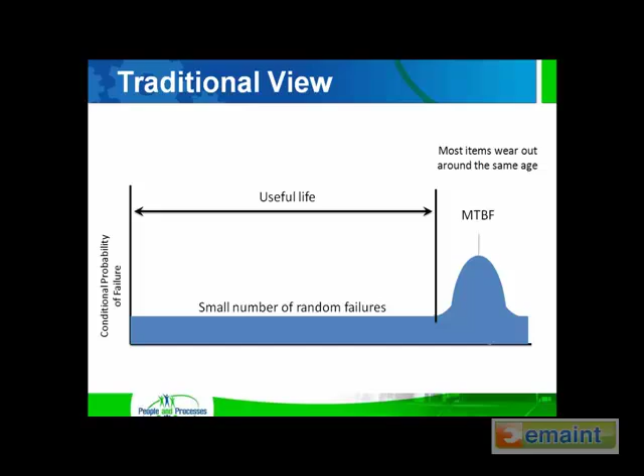So what we do is scheduled overhauls, scheduled restorations, and scheduled discards, as opposed to doing condition-based activities. And if you think about it, really about 85% of all maintenance done today is done in this traditional fashion. About 85%.

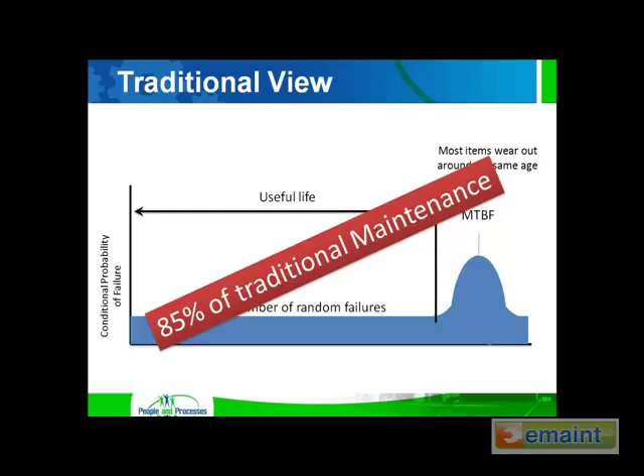So if we look with regard to maintenance cost, your most expensive maintenance that you can do is reactive maintenance, where we run things to failure.

And when we do that, we incur the downtime losses associated with losing the equipment, as well as the cost to repair. In addition, we often have collateral damage, where instead of just losing a bearing, for example, on a pump, we might lose the bearing, the shaft, the impeller, the housing, all due to the damage that comes from running to failure.

Now, if you ask, is run to failure—or should I say no scheduled maintenance—a viable alternative? Yes, it is. It is part of your strategy, but it's also not the dominant strategy we should be using either.

And if we look at time-based PM or overhauls, that's your second most expensive maintenance, and there are many organizations today that still use that as a primary means. As we said, 85% of all maintenance is still time-based, and your least costly maintenance is condition-based maintenance.

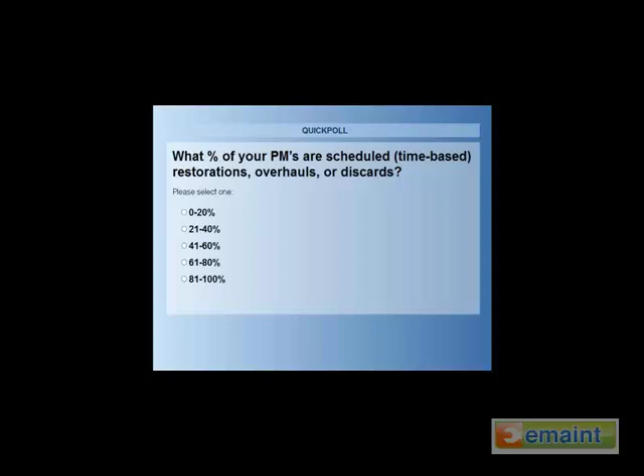All right, we're 80% in. A couple more seconds here. Okay, let me close it and share what we have.

All right, 14% of our audience says it's less than 20%. 5% say 21 to 40. 16% say 41 to 60. 21% say 61 to 80. And then 44%, or nearly half, are saying over 80% of their PMs are time-based.

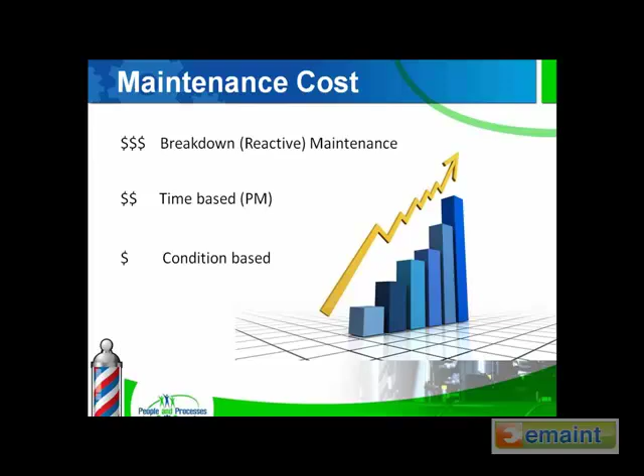Let's look at how equipment actually fails. This comes from the Nowlan and Heap RCM study that was done in the 1960s and validated again in the 1970s and again in the 1980s. It was also part of the RCM2 work that John Moubray did, and they converted it from the military and aviation over to industrial components. What they found was very similar numbers.

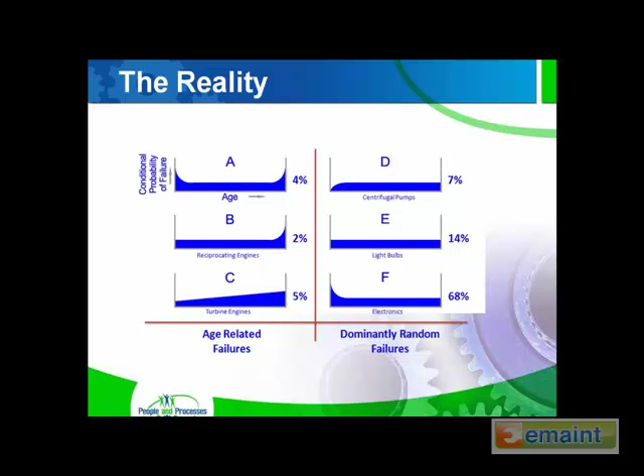Sorry, Jeff, are you there? I think we've lost the audio. Okay, I'm back. Okay, I'm sorry.

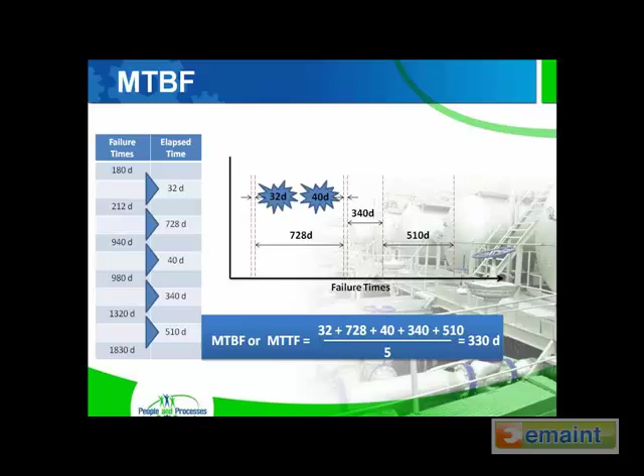Furthermore, if you look at the 32 days and the 40 days as compared to the rest, that suggests infant mortality. Infant mortality can come from several different things: improper installation methods, improper training, inferior parts. Think about what's on the storeroom shelves - they may have been there for years and exceeded the shelf life. Even a bearing has a shelf life with regards to the lubricant drying out and false brinelling occurring while it's sitting on the shelf.

So you need to take all these things into consideration, but time-based maintenance only works when we have a repetitive mean time before failure. We can come back to that, know the useful life is some percentage of that, and do the scheduled overhaul or scheduled discard at that particular point to restore it to usable condition. Again, I wanted to point out that only 11% of all components had a wear-out zone. That again points to not using time-based maintenance.

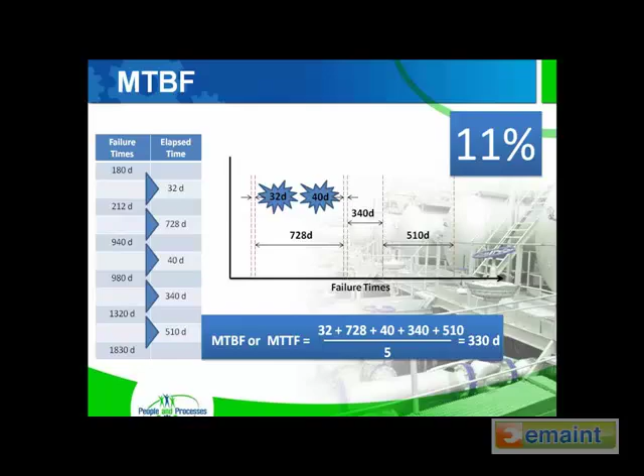If we talk about failure management strategies, we have basically two time-based strategies: schedule restoration and schedule discard. Schedule restoration is overhauls - I'm really trying to get you to use these terms as well. It could simply be restoring lubricant back to a bearing inside a pump, so we're doing the schedule restoration of the lubricant so it'll continue to eliminate friction or wear. Schedule discard is where we change the fluid out, maybe we change the oil in the car as an example.

And then on-condition tasks. An on-condition task takes the form of two different things: either the use of predictive technologies like vibration, infrared, ultrasound, oil analysis, and all those other technologies, or simply just looking for it in the act of failing.

It's important to mention here too, with preventive maintenance, the fixed interval approach means we're replacing parts whether they need to be replaced or not, on an interval based on time. So when we do an overhaul, we're replacing everything whether it needs it or not, and at the same time we're introducing the opportunity for infant mortality simply from poor maintenance practices. There's a statistic out there that says up to 70% of maintenance failures are self-induced - from training, parts, installation, poor purchasing decisions, on and on. So every time we do intrusive maintenance, we offer the opportunity for failure.

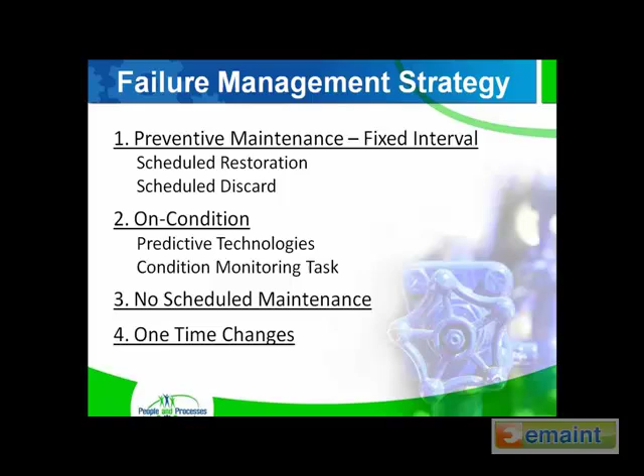People always ask, Jeff, where do we start? I've always heard that we want to do it based on criticality, and if you're doing a new site, criticality is a great way to do it. But if you've already got equipment in place, most people already understand what your most critical pieces of equipment are, and you're already doing tons of maintenance activities around that. You may even have service contracts on it, for example.

But where I encourage people to focus on with regard to optimizing their PM program is, where are you bleeding? Where are you hemorrhaging the most money, the most downtime, the most maintenance hours, the most spare parts cost? Those are the places you need to focus on first and need to optimize, because that's where you're losing your money and you're losing your production capabilities.

So focus there. And borrowing from the RCM piece, what we're really after is to determine what are the actual failure modes of the equipment. And to do that, we want to understand first, what is the function of the equipment? The very first primary function of a piece of equipment, for example, is what we bought it for.

In this particular case, we may have a pump, and the sole purpose we really bought that pump for was to be able to transfer water from tank A to tank B at a minimum rate of 75 gallons per minute. And then we have functional failures.

We may have multiple functional failures for any given function, and typically you have a partial failure and a total failure. So if we look at this particular case, we started with the total failure, and it's unable to transfer water at all. There are failure modes associated with being unable to transfer water at all, as compared to being unable to transfer water at a minimum of 75 gallons per minute, which means partial failure. So we have total failures and we have partial failures.

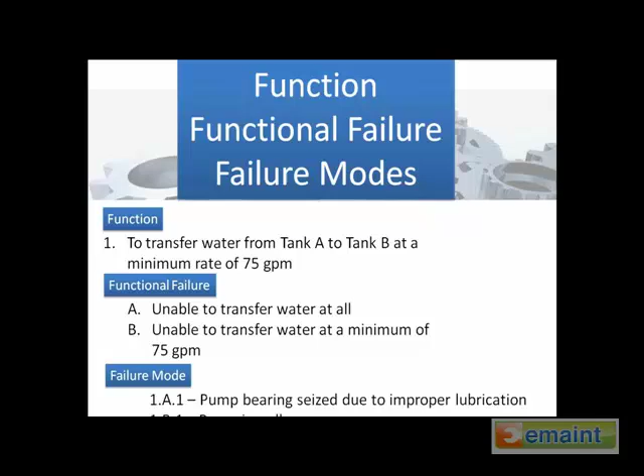If we look at the failure modes for those, for unable to transfer water at all, the pump bearing seized due to improper lubrication. And then we can figure out how we can address that from the PM task, condition monitoring task. We might use vibration as an example to find out if we're properly lubricating the bearing, or many different options that we can use.

And then for 1B1, the impeller worn is we're able to pump, but we only have a partial failure, and we can't meet what their user requirement is. Their requirement is 75 gallons per minute. We may be pumping at 60 gallons per minute. We haven't totally failed, but we're not meeting the user requirements. So we determine our failure modes, and from our failure modes, we determine our task.

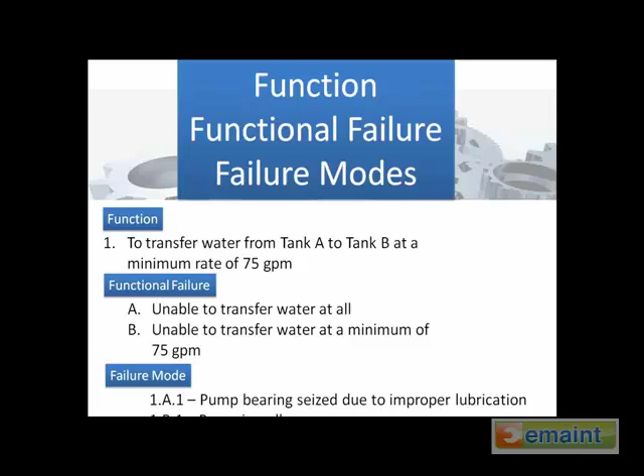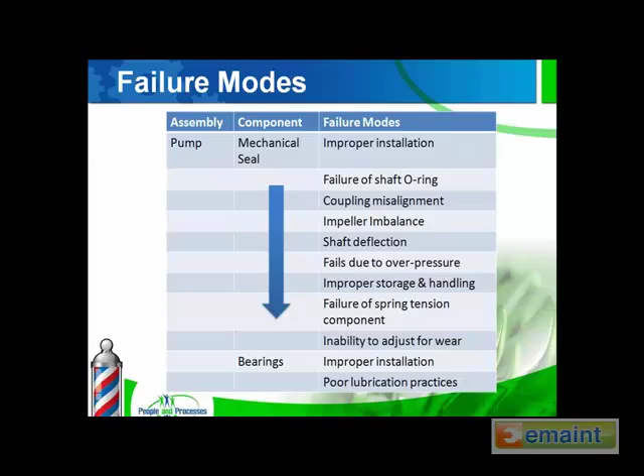So if we look at the failure modes, here's some examples of failure modes. There are lots of different ones, and it's all related really to your operating context. You can't just say, well, I'm going to take this off the internet, I found these failure modes, and I'm going to use them in my PM program. You can't do that.

What happens is your operating context matters—you might be pumping concrete where I'm pumping water with the same pump. So my failure modes might be very different than your failure modes. Again, operating context plays into that.

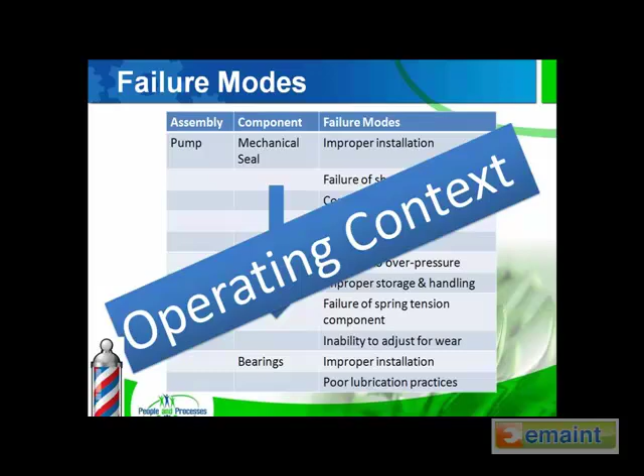And if it is, then the very first thing we want to do is develop a condition monitoring task. And if that's not technically feasible and worth doing, then what we want to do is develop a time-based task, a scheduled restoration, or a scheduled discard. And that has to be technically feasible and worth doing.

If we can't do that, then we either have to redesign the system, and in the safety and environmental issues, that's a compulsory obligation, okay? Where in operational and non-operational, that's not compulsory, and it's up to us to decide whether we want to accept the failure risk. We can't do that from a safety and environmental perspective. And then the fourth option is we can just accept the risk and run it till it fails, and that's a very viable strategy.

If we took the sprinkler system that irrigates the front yard, we're not going to do a lot of maintenance on that. We're not going to do condition monitoring or anything like that. When the sprinkler head fails, we're going to go out and fix it. We're not going to invest money to PM the sprinkler heads. So that's a good example of things that we run to failure.

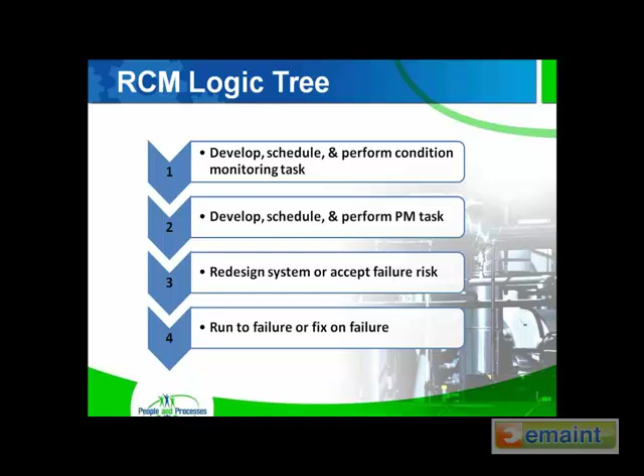So we talked about doing one-time procedural changes, which was basically the same. When we selected something like no scheduled maintenance as an option, that doesn't mean we can't make a change to a procedure. So you think about what happens with your operation side, your startup and shutdown checks, your cleaning procedures, any operator procedures with regard to how they run the machine, any kind of visual aids you can add, for example.

Like a green transparent film over a pressure gauge to indicate this is the zone it should run in, and if it's in the red area, it's not where we want to be. Same thing for maintenance procedures, not just the PM task itself, but also maybe a job plan with regard to how we plan and schedule work and do the corrective action for the repair. And as part of the one-time procedural change, we can also do engineering redesign.

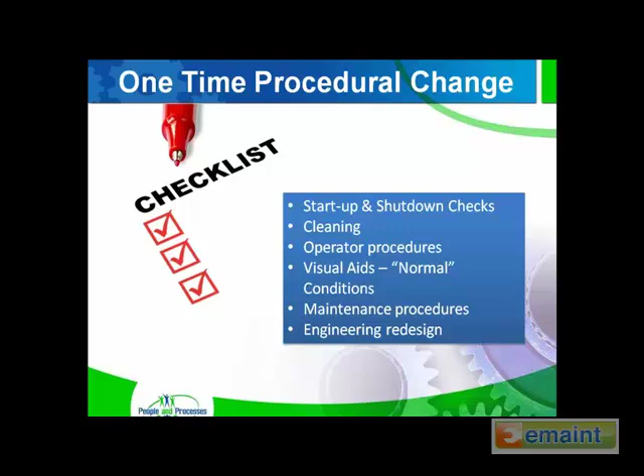When we look at the PM task itself, what we're really looking for is standard procedures or standard work, and we're looking for precision maintenance. We'll talk about precision maintenance in a minute, but standard text, any kind of lockout, health and safety concerns, disposal issues, anything like that, we want to make sure we have in the PM task. We want to make sure we've got ergonomic hazards with regard to lifting or bending, and we want the procedures detailed, with task times for those.

Task times are simply how long we should estimate it to take to do the work. Now, people get upset about task times, but the intent is we've got to be able to estimate from something how long the job's going to take. So what we do is break that down by procedure, by each task step, adding minutes, and then total those up at the end and say, okay, this is a 3-hour job.

We don't really want to get upset if those jobs take longer than estimated, because sometimes they do. We get into a job and realize, hey, we're going to have to do this, for example, that we didn't plan on. Maybe the bolts are rusted and we've got to cut them off, whereas 6 months ago we didn't have that problem. So it's okay if they vary, but if you get in and realize the equipment is going to take longer to fix because it has more damage than originally anticipated...

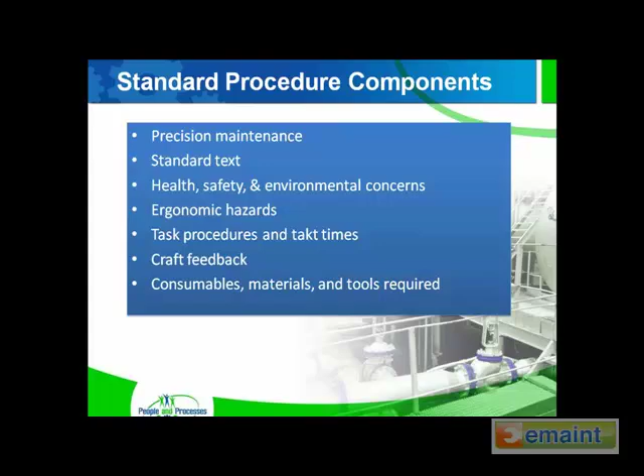If we look at that standard text, what you typically see is lockout, tagout, check belt. Well, if I ask anyone in the audience, I can get one answer for check belt. If I ask someone else in the audience, I can get another answer for check belt. And what do we really mean?

And the same thing for check auger. So what we're looking at is something more descriptive, like what you're seeing now on the screen: lockout, tagout. Install lock on auger disconnect 54 and lockout air valve at column G34. With regard to check belt for discoloration, wear, and cracking, adjust the belt tension between 4.4 to 5.7 pounds using the spring tension gauge. Again, we're looking for precision maintenance, not just the old thumb trick.

And check auger shaft as an example. So here you've got clearances and fits and torque as an example. Again, we're looking for precision maintenance.

And with regard to lubricating bearings, notice it says 0.2 ounces. Well, how would you know that? You actually calibrate your grease guns, so you know that so many shots equals so many ounces. And that way, from SKF for example, you can get a CD that says, for each particular bearing, this is how much lubrication you should be applying to it and at what frequency. And you don't pump till you feel pressure, as an example.

Grease gun's a deadly weapon. It can generate 10 to 15,000 pounds of pressure, so it blows your seals out if you do that. So we want to add just enough lubricant so that we still have enough room in the bearing for the lubricant to expand without blowing out the seals.

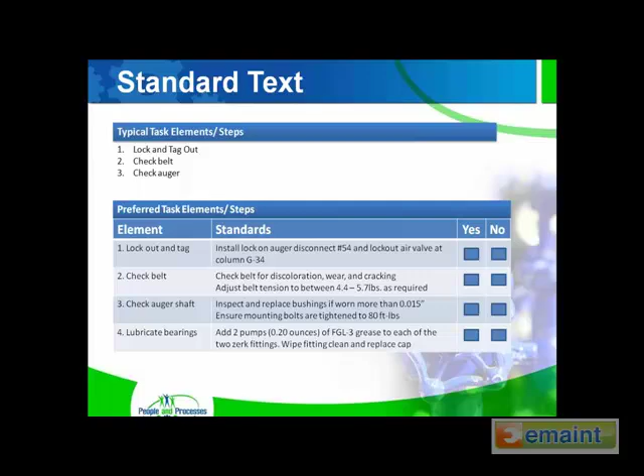Talking about precision maintenance, and I mentioned a little bit ago around torques and fits and that type of thing. How many of you use sheave gauges, as an example? You see a picture of a sheave gauge there, seeing how much clearance you have between the gauge and the actual sheave. Torque ranges and tolerances and those fits, that's the information we want so we can set things to a precise level every time we do the work.

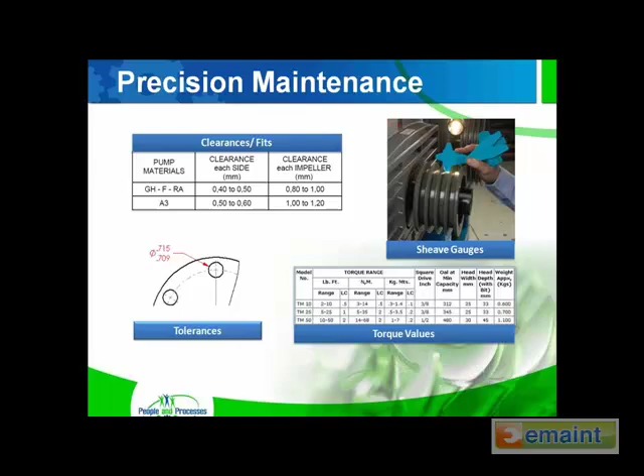I happen to work with mining groups, large mining groups, and they're mining where they have coral heads, and they're surface mining. What will happen is they're transporting the rock aggregate with water, and they'll have a coral head that actually goes through the pump, as an example, and damages the pump. So here's a perfect case where you had an event, and now you have the potential for failure.

And what happens is we introduce that potential for failure—that means we're starting to drop off on the flow. So we've gone from 450, we might have gone to 360 or whatever the case may be. But once we reach 300, which is what the user wants, we're no longer meeting the expectations. If we go to 299 gallons, we're no longer meeting the expectation of the user. So that's what we call a functional failure.

Okay, let me go ahead and launch this for you.

Based on studies, the question is: what percentage of protective devices are already in the failed state right now? If you'd like to cast your vote, do you think it's 20, 30, 40, 50, or 60%? Go ahead and give us your view based on studies of what you believe the percentage of protective devices currently in the failed state is.

What our group has told us is 42% say 20% of devices are in the failed state, 34% say 30% of the devices are in the failed state, 8% believe it's 40%, 11% say it's 50%, and 6% say it's 60%.

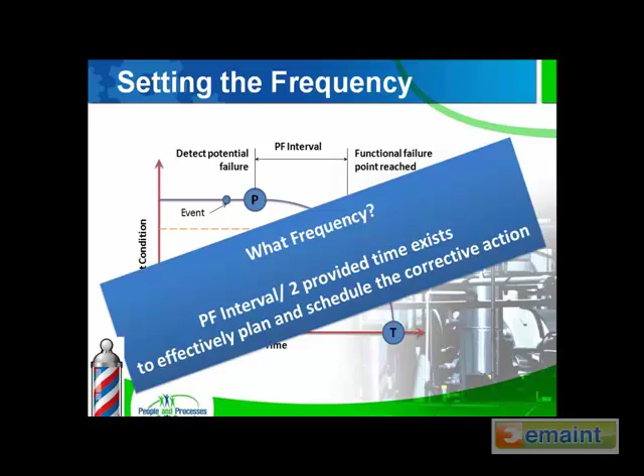So with regard to PMs, I've got to speed this up a little bit since we're getting close on time and I want to answer some questions. One of the challenges for us is we need to make sure we inspect. We get what we inspect. If we're not inspecting, if we're trying to manage from behind a desk, we can't do that very effectively. We need to measure, and then we need to audit.

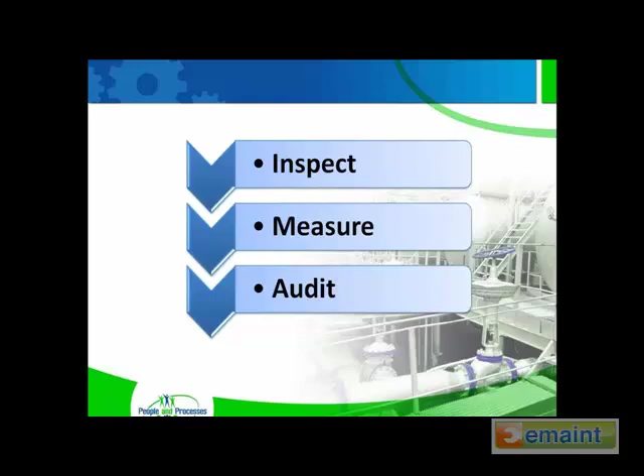So we take 3 PMs out at the end of the week or the end of the month. We take the maintenance manager and the operations manager, and we go look and say, okay, what worked, what didn't. We're not so much focusing on the actual work itself, but whether the processes associated with it worked.

So to measure the value, one of the things you need in your CMMS is corrective repair from PM, PdM, or CBM. What that tells us is when we did the PM, did we find anything from it? In many CMMSs, people don't add that code, and that's very important. We want to determine the value of the PM program through corrective repair from PM or condition-based maintenance.

Then you have other performance indicators: PM and PdM effectiveness, mean time between failure, mean time to repair (MTTR), and PM compliance, unplanned versus planned, or planned versus unplanned. How reactive are you? Ideally, you should only be about 10% reactive.

And we talked about rework earlier. One organization I worked with was only measuring rework out to 48 hours, and they didn't start the clock until over 48 hours, so they never had any rework. The maintenance manager was really proud of that. And I said, well, okay, but you had a failure over here—how long has it been since the line started? He said it's been 60 hours, but that was outside of our 48-hour window. Okay, well, not a good answer.

So we want to focus on continuous improvement. We develop and load the PM task, we schedule those inside the system which triggers, and we work-level those. We execute the job, we get closing notes or feedback from the crafts, and then we improve the PM, and we continue the cycle. Hidden failures is what we started to talk about with regard to the poll question.

It really relates to protective devices. If one of the questions in RCM is: will the functional failure on its own become evident to the operating crew under normal circumstances? Let me show you this example.

We've got a level transmitter in this silo or tank. It's an ultrasonic transmitter controlling the level using the programmable logic controller between 5,000 and 9,000 gallons, and the operator normally sees that. Now we have a high level that sets the trip at 9,500 gallons, and a low level that trips at 4,800 gallons. The question is: will the functional failure of the high level, or the functional failure of the low level, on its own be evident to the operator under normal operating circumstances? And the answer is no.

So you could actually fail either one of the switches at the top and the bottom, and the operator may never know because the level's being controlled separately. You can think of it almost as your spare tire in your car. You've got the tires on the outside of your car that you're rolling on now, and you've got your spare. Unless you've got a pressure sensor on that tire, without doing failure finding activities to see if it's failed, you would have no knowledge that it had failed on its own.

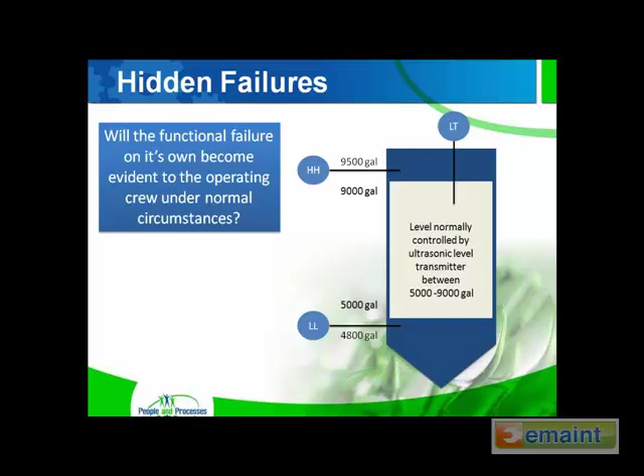If you think about protective devices, which in some cases are hidden, they warn operators of abnormal conditions. It could be a sign, a light, a horn. They shut down equipment in the event of a failure, it could be a relay. They eliminate or relieve abnormal conditions caused by failure, might be a pressure relief valve. Or they take over from a function that has failed, might be a standby pump taking over from the duty pump. Or they prevent dangerous situations from arising, a guardrail is a good example.

So not just instrumentation, but even things like guardrails or signs on the elevator. If you think about it in a hotel, don't ride this elevator in case of fire, use the stairs instead. That's actually a protective device.

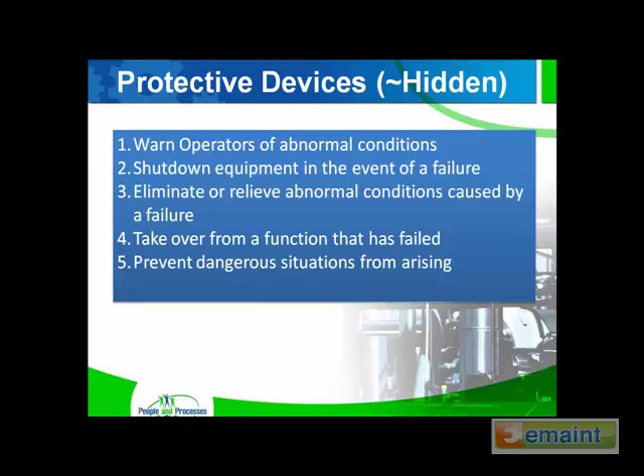And how many protective devices do you have? How many do you currently maintain? We've already asked this question. I thought I might have had too many poll things in there, Ron, so disregard that one.

In many cases we don't realize how many protective devices we actually have in the organization. And these are the things that are really going to bite you when it comes back, because they're the kind of things you're relying on to save people. So when we talk about that, things like emergency stops, pressure relief valves, rupture discs, even your smoke detector or that spare tire. If you think about it, how many of those are you really maintaining? The scary part is there's probably 40% in your factory that you don't even maintain, and there's probably another 40% that you don't even know about as part of that. They're even there.

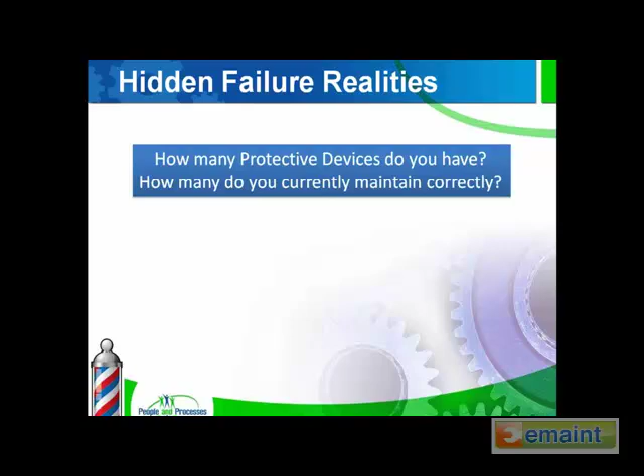That's it. I wanted to mention some additional points, well, I'll hold off there for a second, continue on just a minute with the hidden piece. Be sure to consider the hidden failures inside your organization and your protective devices, because those are safety things you might not have visibility to unless you do a failure finding activity. In other words, you go looking to see if that actually is operating.